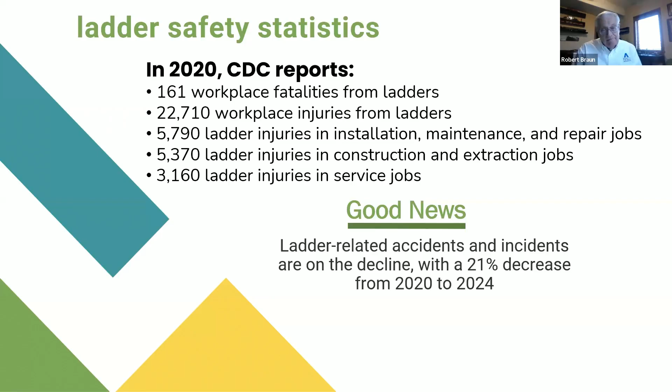Dave always does a great job. I know you are interested in some of the issues that we'll go through, and Dave will cover a lot of this, but these are the primary causes.

Incorrect extension ladder setup angle. In fact, about 40% of cases are due to incorrect extension ladder setup, and I know Dave will cover that. And inappropriate ladder selection, choosing the wrong tool, not the proper size or proper duty rating, and I know he's going to speak to that.

Then insufficient ladder inspection, which is, I think, the first step—make sure you inspect the ladder before you use it. And then improper ladder use, not using the ladder properly. So I know you'll learn some basic facts about ladders today and their safe use during this session. These are the basic tenets that will raise your awareness and help you prevent injuries. Just like any tool, using the right tool and using it the right way is fundamental for achieving safety.

You'll also learn about some of the design features available in ladders that you may not be aware of, which I find very interesting. I think you'll find this presentation both educational and interesting. So let's get started. It's my pleasure now to introduce Dave Francis from Little Giant.

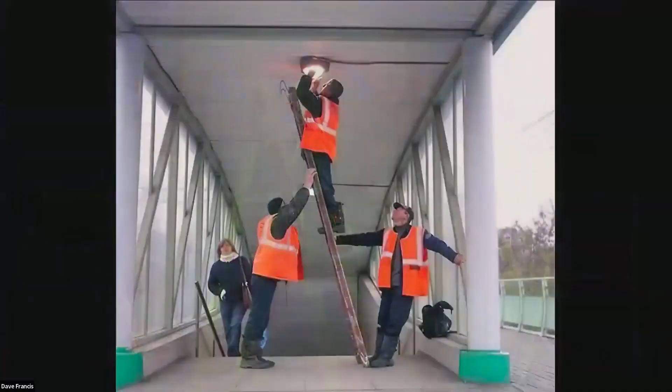We kind of like to talk about, set it up, why we talk about ladder safety as much as we do. I get sent crazy pictures probably weekly, but over the years, and if you've heard me talk before, this has always been my favorite picture because it tells too many stories. These guys are trained, they have the right PPE, they probably have the right ladder on their truck. They just got creative to try to save a little bit of time. But we're talking about multiple OSHA fines, multiple possible injuries, and even some possible lawsuits because of the lady coming up the stairs if she gets pulled into their shenanigans.

So when we talk about ladder safety, creativity is the enemy of safety.

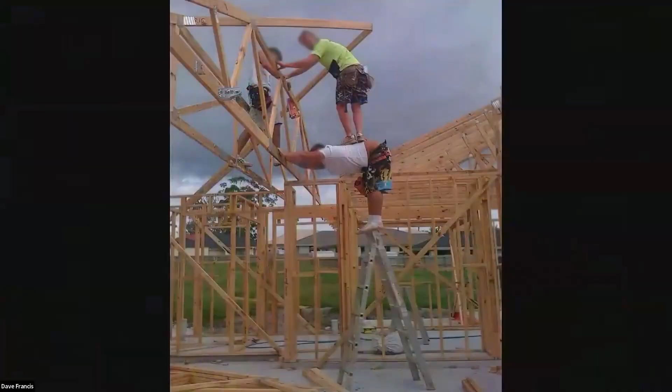Here's another one of my favorites. These are framers, and we know framers will do just about anything to get the job done, get on to the next job. But if you look at the guy on the ladder, he's actually stocking-footed. The guy on top of him has shoes. So I don't know how they thought that was going to work out, but obviously not the way OSHA recommends that we do things.

It is so serious that 4 of the top 10 OSHA violations are work at height related. Fall protection, of course, number 1. You can go past any job site and see guys on the roof without the harnesses and lanyards. Ladders jumped from 5 up to 3, and then scaffolding and training are up on that list, so 4 of the top 10. More critically, though, is the fatal 4.

OSHA tracks fatalities, and falls is by far the number one cause of fatalities. Of course, OSHA doesn't track automotive accidents in this because that's DOT, but fatalities from falls is right up there with fatalities in car crashes. And so we think that we need to spend a little bit more time talking about working at height because it is the number one cause of injury and fatality on your job site.

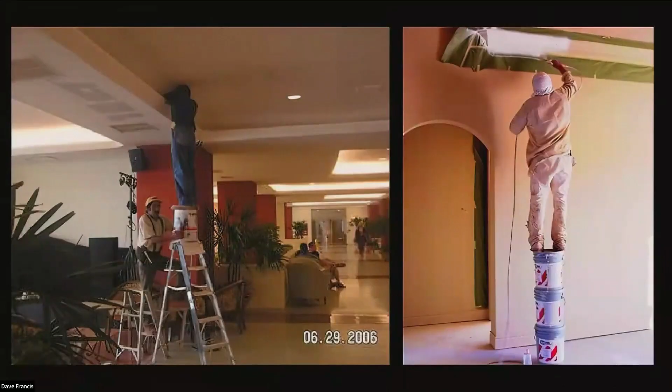When we're choosing the right ladder for the job, choose a ladder. That sounds silly when I say it that way, but when I show you this picture, you completely understand what I mean. Time after time, I see people standing on things that are not ladders to try to work at heights. We've all done it. We've all stood on a desk. We've all stood on a chair. We've all stacked something up so that we could climb up and get something done.

Stop what you're doing. Go out in the garage. Go out in the shed. Get Grandpa's ladder, drag it in. Don't stand on that bar stool that spins around to try and get that job done.

Choose a ladder. Ladders come in fiberglass, aluminum, and wood. There are no more wood manufacturers, so if you have a wood ladder, it's an antique. Generally, ladders in the United States are aluminum, shiny silver material, or fiberglass, which will be a color - a yellow, an orange, or a green.

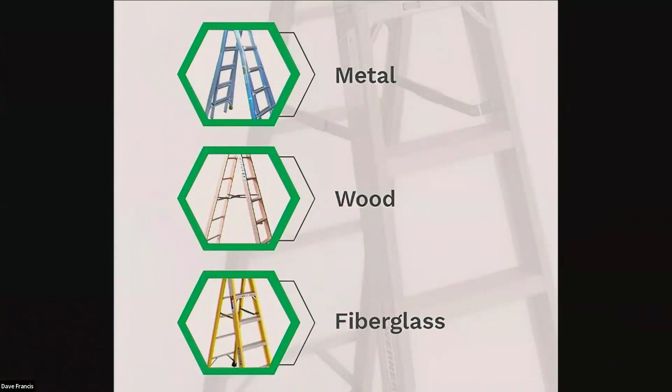Why do we default to fiberglass? Well, fiberglass is non-conductive. So the majority of ladders used for homeowners, the lightweight, inexpensive ladder that a homeowner would buy, are going to be aluminum ladders. The ladders that we see on job sites are fiberglass because they're non-conductive.

Well, people ask me all the time, those rungs sure look aluminum - how is that ladder non-conductive? Well, the side rails are non-conductive. The climber is insulated from the shock, or grounded from the shock. So all fiberglass ladders will have aluminum rungs.

There's just a very few specialty ladders used in turbine engine power that are completely made of fiberglass, but they're very rare and very expensive. You're grounded through the side rails.

Okay, weight rating. Weight ratings start at 200 pounds. Those are homeowner weight ratings - lightweight, flimsy. Don't put them on a job site. It doesn't say construction and industrial until 250. But I want to talk about why we recommend you have 375-pound rated ladders on your job site.

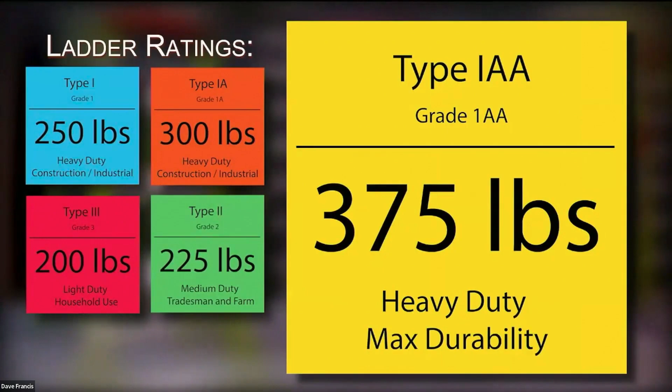You've seen guys on job sites, and I'm getting up there, but the weight that is supposed to be on the ladder is not the weight that you tell people you are. It's the weight that the scale says that you are, not the weight from your driver's license. Then adding your PPE, adding your clothing in a cold place, any tool belt, anything you're carrying up - it's pretty easy for some of the guys on a job site to get over the 300-pound mark.

And if they're over 300, then we need to jump up to a 1AA, 375-pound rated ladder. We'll talk a little bit more about that rating in a second, but make sure that what you're wearing, what you're carrying is under the rating on the ladder, and that label is clearly visible to read.

Now, style of ladder is important. This is a step ladder or an A-frame ladder. Looks like a big capital A. The standard calls this a self-supporting ladder because it stands in the middle of the room.

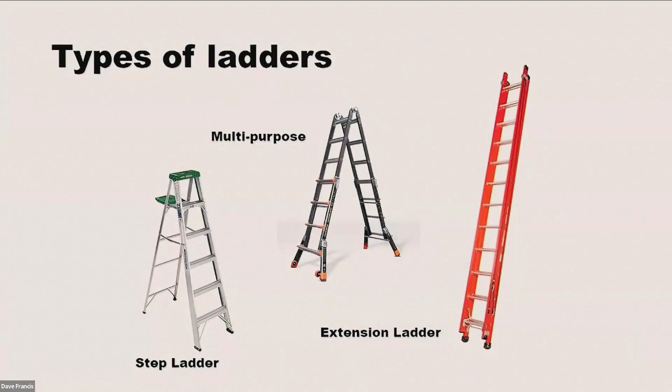You can also have a straight extension ladder. Those are also referred to as non-self-supporting or lean-to, depending on where you're from. And then multi-purpose are ladders that will telescope or bend from shape to shape. Little Giant actually invented the multi-purpose style of ladder 52 years ago, and those are designed specifically to go into stairs.

But ladders are meant to be used for the purpose for which they were designed. So make sure that you're using the ladder for the purpose that it was designed.

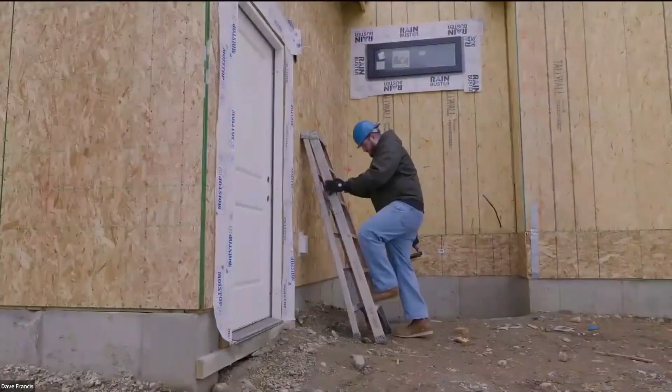For forever and ever, we told people never close an A-frame and lean it against the wall. Well, why? Well, old A-frames, Grandpa's A-frame, the back legs would swing open and contact the ground and throw your balance off. The top cap was just a black plastic cap - it didn't have any grip.

So ladder companies, all ladder companies in the United States right now, make a leaning A-frame because workers just have to get in all of these really tight, hard to get in areas. So we designed our newer A-frames to lean.

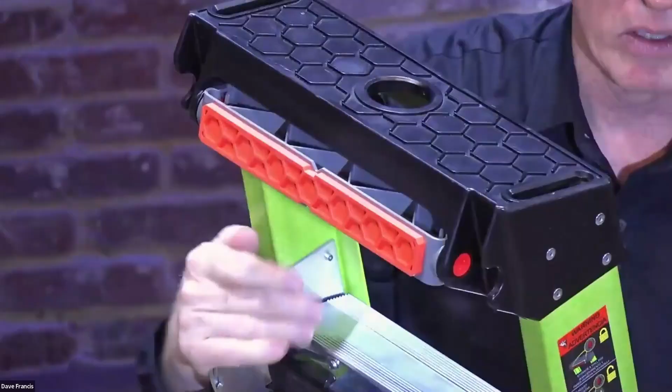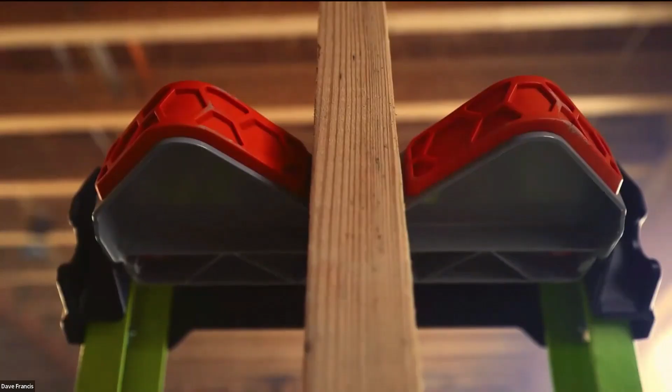The way to do that is have this pad here at the top cap that's going to support the ladder. Now, if you're not going to a flat surface, that's going to flip around, and now that's going to go to corners and studs and poles so that the top of the ladder is really going to grab a hold.

Know that because there are newer ladders that can lean in the A-frame position, that doesn't mean your old Grandpa ladder can now be leaned. Make sure that it's clearly stated on the label that it's a leaning A-frame ladder, but that's really a great way to get into a lot of the hard to reach places.

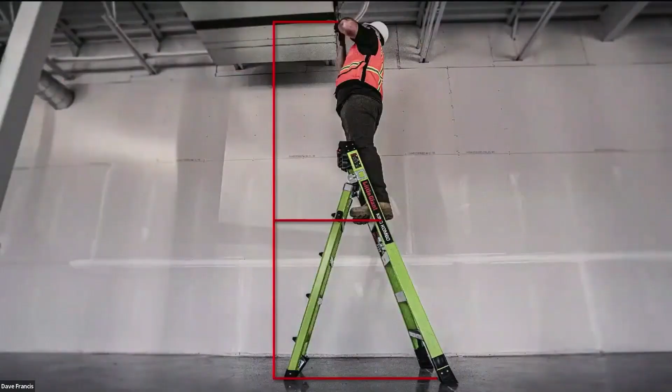Let's talk about the size of the ladder now. This is a 6-foot A-frame. OSHA says don't stand on the top cap, don't stand on the top step. So on a 6-foot A-frame, I'm really standing 4 feet off the ground if I'm using the ladder correctly. Average height and reach of a worker gives you an extra 6 feet. So from a 6-foot ladder, I can safely work around 10 feet.

If I need to work higher than that, I need an 8-foot or a 12-foot step ladder. Just know that you're going to need to stand 2 feet from the top so that you have something to lean into and maintain balance and control. And you're going to add another 6 feet from that standing surface in order to get your working height.

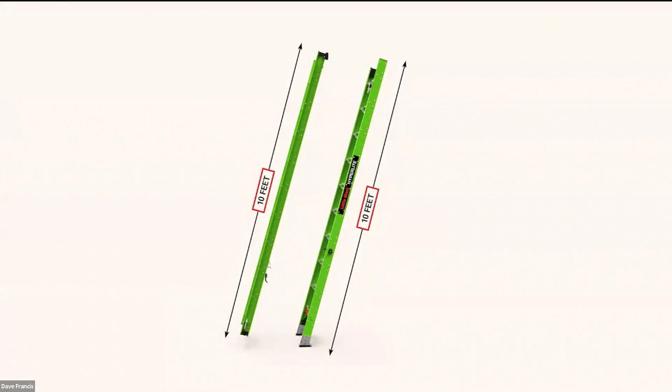What about straight extension ladders? If you go to the store right now and buy a 20-foot extension ladder, that ladder is going to be 20 feet of ladder side rail. So you're going to get two 10-foot sections of side rail that add up to 20 feet. We clearly mark it on the label, 20 feet of ladder. But that's not how you use it, right? To use those two sections together, you're going to have 3 feet of overlap. So a 20-foot ladder that you buy in the store is only going to be 17 feet long in the usable position. And then OSHA says 3 feet above the roof line.

So now I'm going to a 20-foot roof line. I'm 3 feet shorter and I need 3 feet extra. I need 6 extra feet. So I need a 28-foot ladder to go to a 20-foot high roof line.

So why is that? I'm going to jump to that in a minute. Sorry, I'm talking to Paxton in the control room.

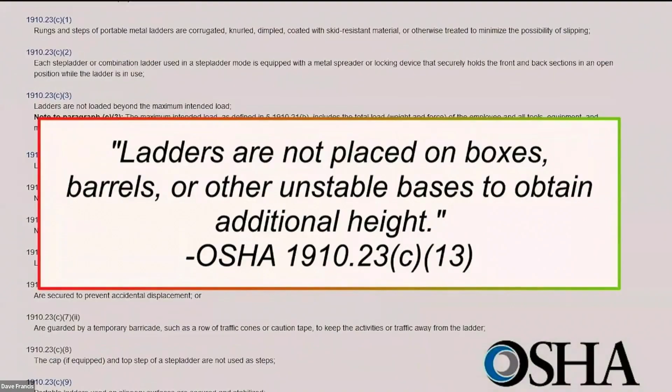In order to gain height with a ladder, don't pick it up with a forklift. Don't stack it on boxes, barrels. Don't climb up on the railing of any ladder. Just not the safe way to use the ladder. Don't straddle or sit on it. And please don't try to put it up on tables to try and gain extra height. The ladder is rated at 300 pounds, but the tables or barrels that you put that ladder on are not rated for that 300 pounds or that position.

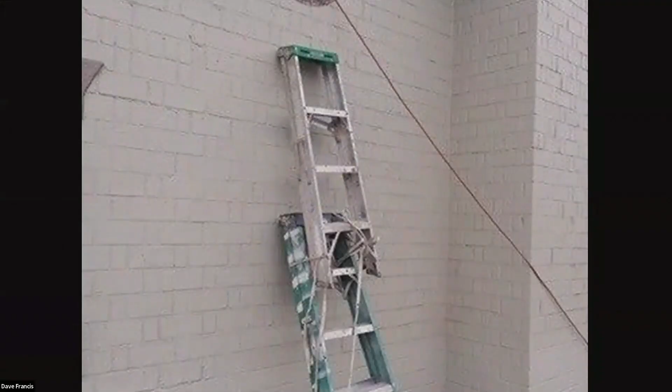Never try to tie two ladders together. You just don't have strong enough duct tape or wire or rope to try to put two ladders together to make the right ladder for the job. If you don't have a big enough ladder, stop what you're doing, go back to the shop, get the right size ladder. If you're at home, go across the street, meet your neighbor, and borrow his. Get that done. Don't try to create something. Again, I've said this before, creativity is the enemy of safety.

So we've chosen the right ladder for the job: the right material, fiberglass, the right weight rating, 300, 375, the right style, and then the right height. Now that we've got the right ladder for the job, we need to inspect it.

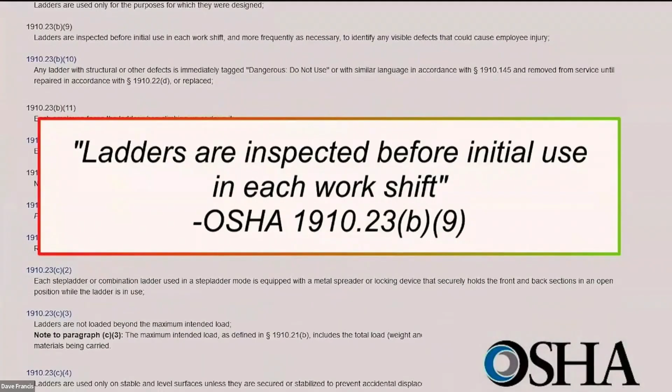Inspection in the standard is a little tricky, and I get asked this in the questions a lot, so I'm going to try and jump ahead of it. Ladders need to be inspected when you first receive the ladder, when you first buy it. Ladders are damaged in transportation most frequently, so we see ladders being damaged just being delivered to the customer. They need to be inspected at the start of every shift or before each use. And they need to be inspected regularly and periodically by somebody who's in authority and has the power to do something about a bad inspection. That's usually interpreted as a manager or somebody from the safety department doing a detailed inspection once a year or semi-annually.

For a visual inspection that you do every time you climb a ladder, we don't need 15 minutes, just a quick visual. The things that get overlooked the most are the feet.

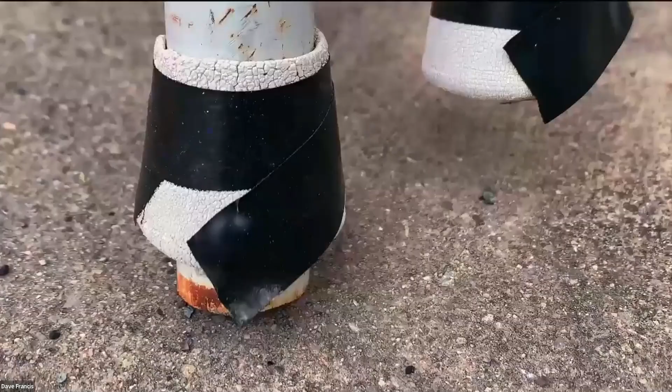The feet of your ladder are made of a softer material with tread at the bottom, designed like tires on your car to grip the ground and prevent the ladder from slipping out from underneath you. If those feet are damaged, missing, or worn out, they can simply be replaced by removing a nut and bolt or a couple of screws, and ladder manufacturers have stacks of new feet so you can swap them out quickly. Don't throw your ladder away because you have bad feet, just get new feet. Remember, that's your connection to the ground, so we want as firm a connection as possible. We don't want that ladder slipping or moving while you're climbing it.

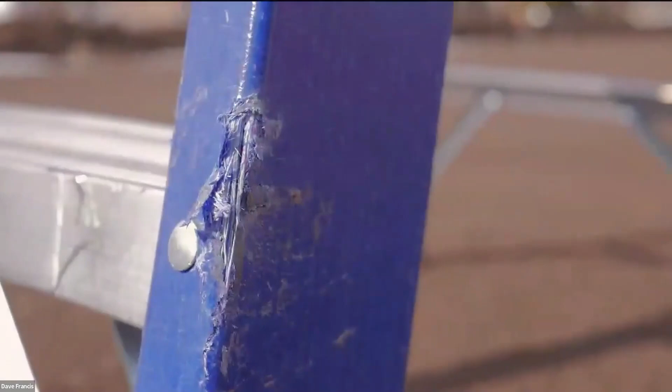Now, the side rails of the ladder, if they're bent, broken, cracked, or split, the ladder needs to be tagged out, removed from service, and reported to a supervisor.

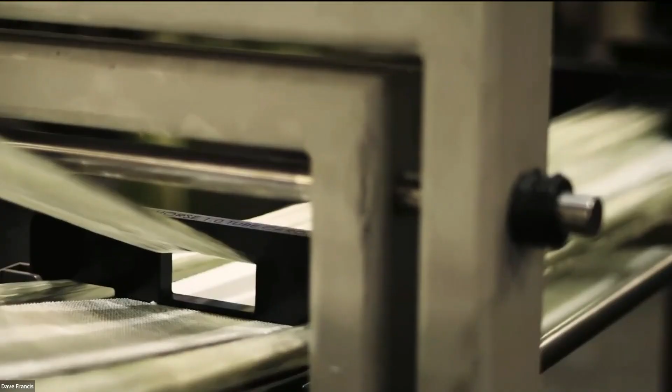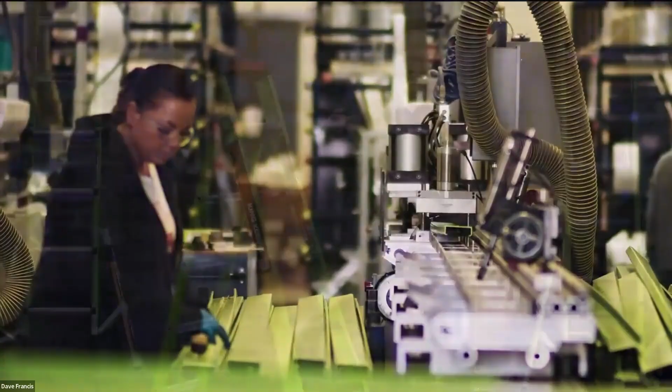Now, fiberglass is interesting. It's got some great properties in that it's non-conductive, but it also has some downsides. When we make fiberglass, we actually use spools of fiberglass string or strand, which is glass spun into threads. That's run through a shaping die and then injected with a plastic resin that holds all of those strands together for strength.

But if the ladder is damaged, hit, or cracked to the point where you can see those fibers through the resin, so if you've dinged that corner and you can see strands sticking out of the glass, that cannot be fixed in the field. It needs to be tagged out and taken out of service. I don't know what that will hold. I know what fiberglass in new condition will hold, but I don't know what damaged fiberglass will hold.

The rating we talked about earlier, that ladder is not going to break at 375 pounds. It's actually tested at 4 times the rating. So a 375-pound rated ladder is tested at 1,500 pounds, that's 5 very large guys on the ladder, and it's not going to break, move, or bend.

The problem is ladders get used dynamically. Ladders get used with minor damage. Ladders get used on uneven surfaces. So we overbuild ladders by 4 times to prevent the ladder from breaking while you're standing on it.

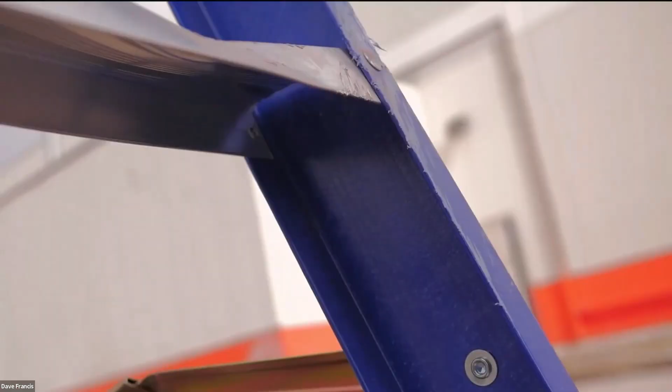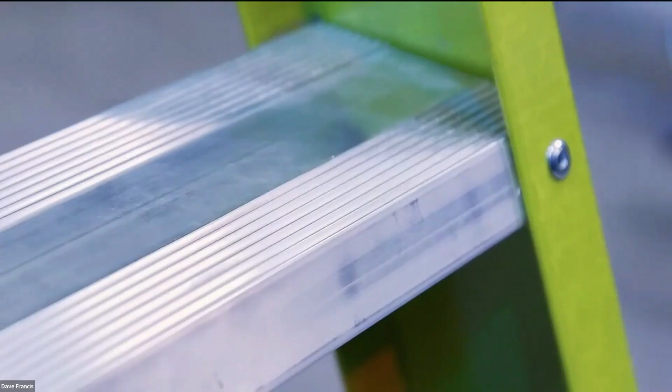You can also see that all these rungs have ridges that run side to side in the extrusion. Those are designed to hold your foot in place as you're climbing the ladder so that your foot doesn't slip off. If those are all filled in with mud and dirt and tar from the job site, clean those steps off, make sure those steps are clean and dry, and that those ridges are grabbing your foot and holding on as you climb the ladder up and down.

Components of your ladder, you're going to have maybe ropes and pulleys, hinges, top caps, spreader bars. All of these things can be replaced in the field. The ladder company will have a kit with directions on how to do that in the field. But repairs to side rail, where I see people bolting 2x4s into the side of the ladder, those are not allowed.

Re-welding your rungs is not allowed.

I inspect people's ladders as I drive down the road. I've been doing this for over 40 years, and so when I see ladders on trucks, I pick up on the things that people do to their ladders, and then they're on their way to a job site to set these ladders up to get work done. And any one of those ladders could be the cause of an accident, because I don't know what a damaged ladder is rated for. I do know what a ladder in new condition is rated for.

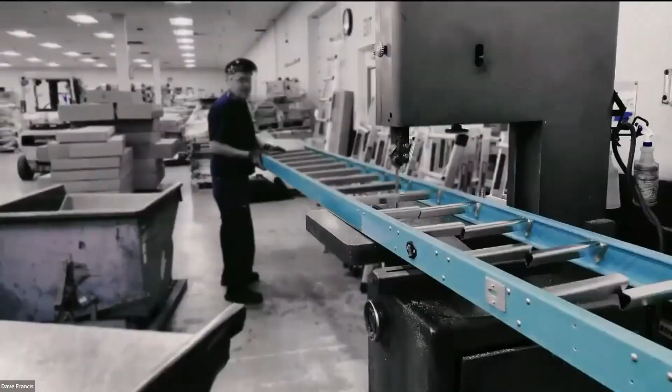So make sure all of your components are in good working order. The side rails and the rungs, if they have dents, cracks, or splits, you need to take that ladder out of service. If you're going to destroy a ladder, please don't throw it, especially if you got your logo stenciled on the side of it. Don't throw that ladder in a dumpster without cutting it up. Unfortunately, there's been lawsuits in the United States where people have pulled ladders out of other companies' dumpsters and then sued that company because they didn't dispose of the ladder correctly.

Don't cut your ladder through the fiberglass. It's very abrasive and will wear out your blades really quickly. Cut it down the middle. It'll cut like butter through that aluminum and plastic and make it unclimbable at the same time. So if you're going to dispose of a ladder, make sure that you get it all the way to the dump, or that you cut it up so that it's unclimbable. You just don't want to give people access to a usable ladder in bad condition, or you're still liable for it, unfortunately.

All right, we picked the right ladder for the job: fiberglass, weight rating, style, size. We've inspected it to make sure that it's in good condition: feet, side rails, rungs, components. Everything's in good working order. So now the ladder's probably not going to be the cause of the accident. Now the cause of the accident is going to be us - decisions that we make, things that we do.

Again, please do not get creative in ladder safety or in ladder setups. No matter how many old phone books you use or wood things that you build up to try to get into those hard to reach places, know that that's the first time that setup is being used. It's never been tested before, so you're taking this huge risk of being the crash test dummy on the maiden voyage. Please don't take those risks. I know we all think that we're structural engineers in our head.

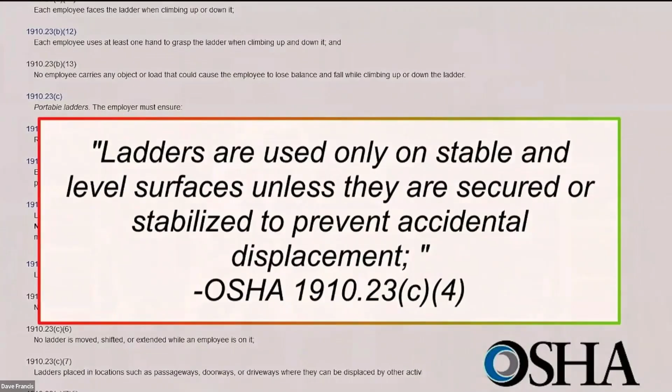But OSHA says that ladders need to be set up on stable and level surfaces. And if that's not possible, then the ladder needs to be secured or stabilized to prevent accidental displacement. What does that mean? Well, if you can set a ladder up in a condition with a perfectly flat floor, so that it's stable and level, then I'm fine to climb just by following the rules of 3 points of contact, making sure that I just keep the rules of climbing.

But when we're out on a job site, how often is the ground actually level? If the bottom of your ladder is a little off, I have people tell me all the time, I climb it over here. So you're doing a Cirque du Soleil or geometry calculation that if my ladder's that far off, I can climb it over here, and I'm just going to balance it out and stay in this thin line of my balance point. That's not the way OSHA wants to do it. What do we see on job sites that people do the most often?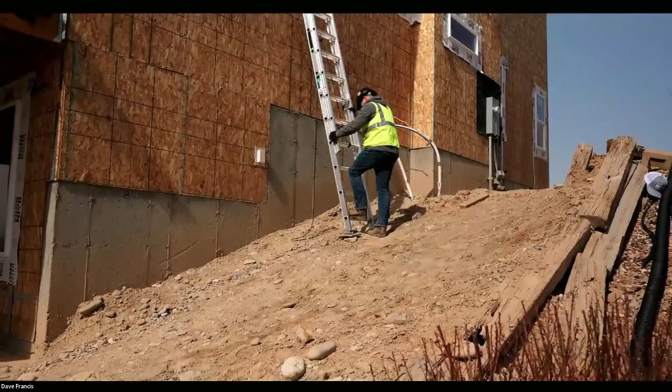The most common thing I see is that people will go around the job site on an Easter egg hunt for the right size piece of garbage, scrap wood, a rock, to build a Jenga pile of death to put their 28-foot extension ladder on. So they're placing their safety equipment on a makeshift stack of garbage from the job site. Not the way.

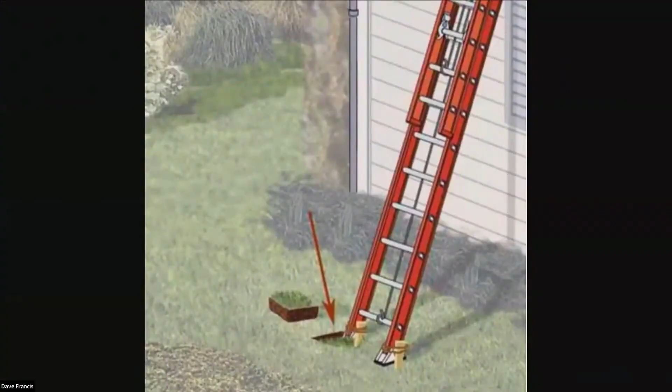No one's going to argue with me that that's the preferred way to do this job. OSHA says dig out the high side. Never build the low side up with bricks and boards. Always dig out the high side to level your ladder. This just doesn't happen very often because it's labor intensive and you don't go around with a shovel and a level. But there are some easy solutions to how to do this.

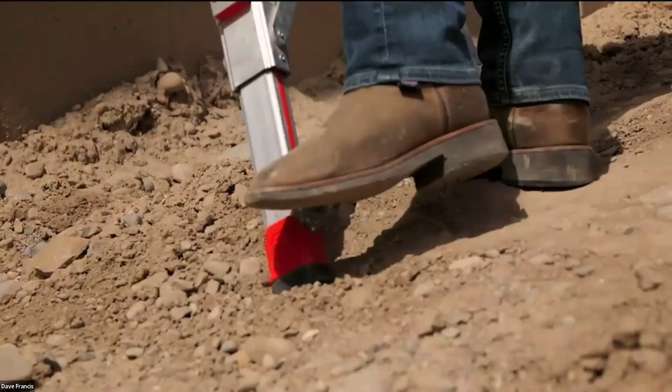There are ladders designed with leveling capabilities built right in. So in a situation of uneven ground, you'd be able to just open the leveler and level to the work surface, getting the job done quickly and safely with a very secure base at the bottom.

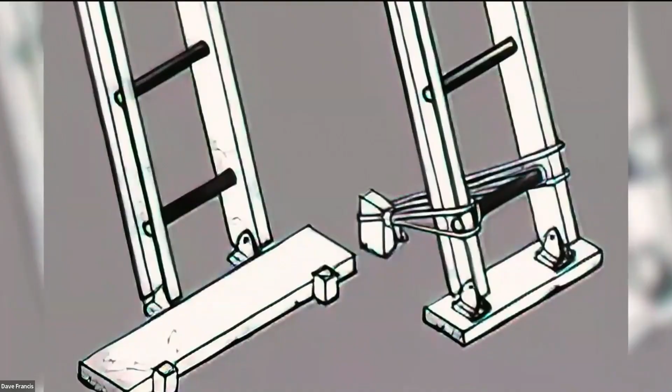If you need to stabilize grandpa's traditional straight extension ladder, there's a lot of diagrams in the OSHA handbooks about how to build blocking or a stake, then strapping at the top of the ladder. We want to make sure that if you're strapping at the top of the ladder for your company, don't use bungee cords to rain gutters. Make sure you're using an engineered strap that's designed to do that work.

This is especially important if the ladder is being used by multiple individuals. If you have multiple people using the same ladder to gain access to the roof, that ladder needs to be secured in place so it doesn't get dislodged in between people. That's a key factor we always overlook. If I'm going up on the roof, I can go up and do an inspection and come back down. But if I've got 10 people going up and down, I need to make sure that ladder isn't moving. It's got to be secured in place.

So we've talked about the side-to-side angle. Let's talk about the extension ladder angle. There are a lot of times when you're going up on the roof that you need to decide what angle your ladder is leaning against the wall or onto the roof. We don't go too steep, or the ladder will fall over this way. And most people go too shallow, which means my forces are going out this way, and then the bottom of that ladder is going to kick out from underneath us.

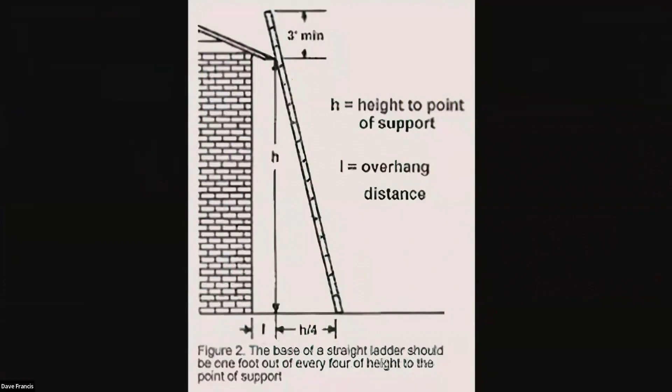So OSHA's given us a little diagram, bless their hearts. For every 4 feet we go up, we come out away from the wall 1 foot. But we only measure up to where the ladder makes contact, and we come straight down from that point. So we don't measure out from the wall, we measure out from that make-believe line that comes down from the eave. I can't do geometry.

I can barely do my grandkids' second grade math. So firefighters figured out a long time ago they don't have time to do the math equation. Everybody's body is built at a 4-to-1 ratio, your height to your arms. So put your toes at the bottom of your ladder, put the palm of your hand at the side rail or rung at shoulder height, and you'll set your ladder up at 75 degrees every time. Before you climb an extension ladder, make sure you hold your arms straight out. It only takes a second, that quick. You can see the A-frame ladder is already set at 75 degrees. That's exactly where my hands go to set that ladder up in the proper position.

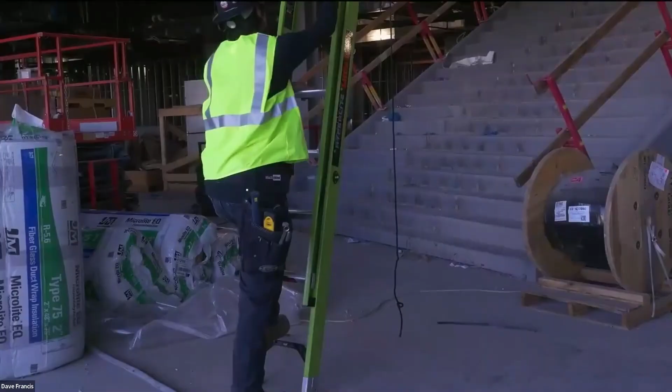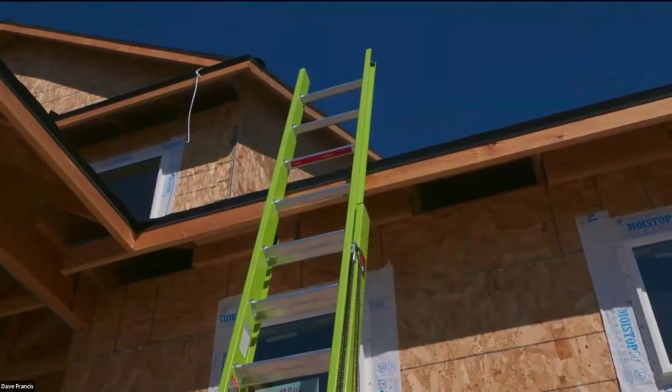Little Giant actually adds some advantages on extension ladders, where we put a bubble level on the side that tells you you're exactly at 75.5 degrees. But use the firefighter method, that'll get you at that 75 degrees almost every single time. When you're setting up a straight extension ladder, make sure you're 3 feet above the roof line. We talked about that before. That's the number one cause of citation from OSHA.

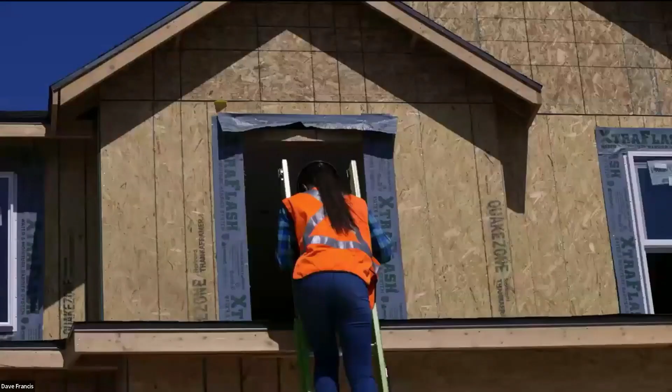50% of the citations involving ladders are just because of this one issue, so it's a red flag violation. We really need that 3 feet of ladder to hold on to as you transition on and off of a ladder.

Now, if you're going up onto a roof to work, you're gonna need to transition into a fall protection system. I don't want anybody to criticize that. She was going up for an inspection, which technically she can do without having that tie off, so if anybody's gonna call me on that, we thought ahead.

Now we want to talk about proper climbing techniques. We started climbing ladders when we were little kids, so we do things wrong that we've done our whole lives. There's 3 paragraphs in the OSHA standard that kind of go together, and they really point out what OSHA is trying to accomplish with these 3 sentences.

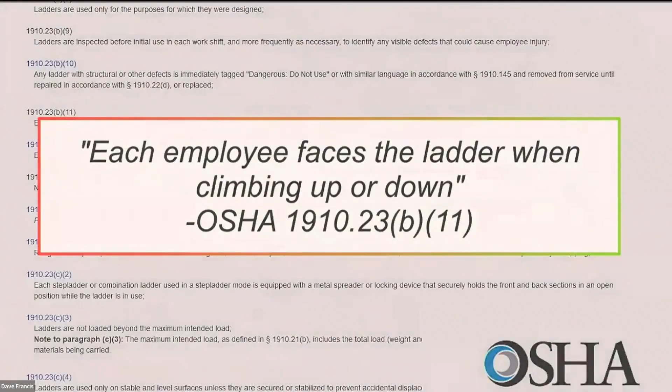I think the first one is maintain contact with at least one hand as you're going up and down, and I'm going to emphasize the going up and down. So that's really the 3-point of contact rule: 2 feet 1 hand, 2 hands 1 foot, as you go up and down. Face the ladder as you go up and down, and never carry any bulky, heavier items that are going to cause you to lose your balance or fall as you climb.

So OSHA wants you to get up and down the ladder safely, but they're talking specifically about as you're climbing up and down.

Tools should be brought up in buckets or lifts, or if you can carry it up on a tool belt, that's fine. If you have a small tool in your hand, that's fine. But excessive tools needs to come up another way, bigger pieces of equipment. We don't want somebody trying to use a ladder to be a physical lift to try and get a big, heavy, awkward piece of equipment above them. That's just not the proper way to get that kind of work done.

So face the ladder, one hand in contact at all times, and then don't carry big items up and down the ladder. But they really want you to get up and down the ladder safely.

Now, what happens if I stop to do something on a ladder? Most people consider extension ladders a transitional piece of equipment where you're getting from the ground to the roof to do the work. But on an A-frame ladder, my only purpose for going up is going to be to work on something, and that something needs both hands.

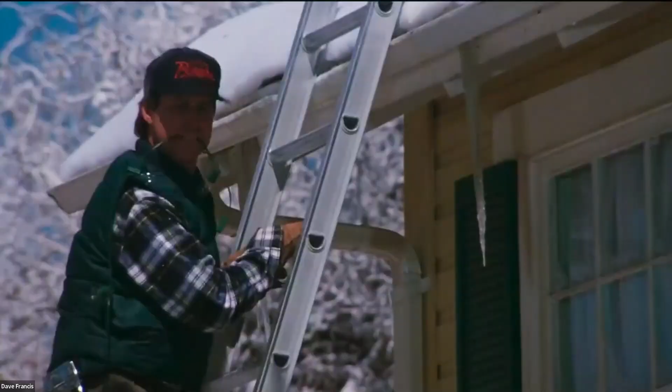I know we get doing a project and we want to get it done fast because we're trying to get into the game or do whatever, and we overreach. We try to get the job done by taking risks. Just follow the basic rules. Again, creativity is the enemy of safety. Please don't try to go beyond the basic rules of ladder safety. Ladders are safe in that they're overbuilt for your weight and for what you're doing, but they're unsafe in that they're easily misused. Does that make sense? It's easy to do, it's easy not to do.

All right, let's talk a little bit about common accidents in the workplace. What are the number one, two, three causes for people to file a claim or take a day off work because they got hurt on a ladder? Well, you'd think all of them would be from falling off, but the number one cause, the biggest number of claims filed, are because ladders are heavy and they're awkward. And every time you take them to a job site, guess where they are?

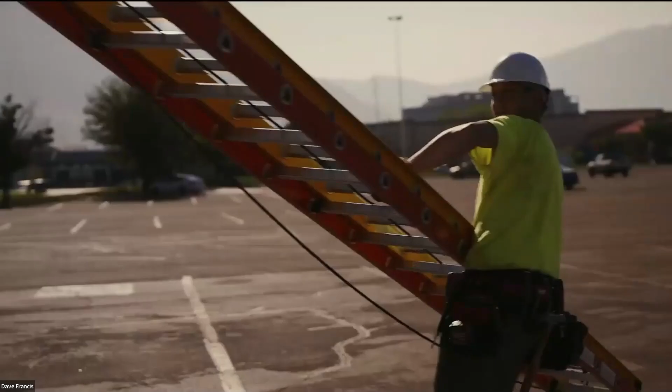They're on the top rack above a van or above a truck, and your employees are now trying to pull the ladder off of the rack by climbing on the wheel well, the door jamb, the tailgate. Some of the most dangerous situations they're in is trying to get their piece of safety equipment off the truck. Know that there are ladder racks that pivot to get that ladder into a more ergonomic position, or if you're sending a bigger ladder that exceeds that 50-pound limit, make sure you've got a couple of people handy on that job site that can help get that heavier piece of equipment off.

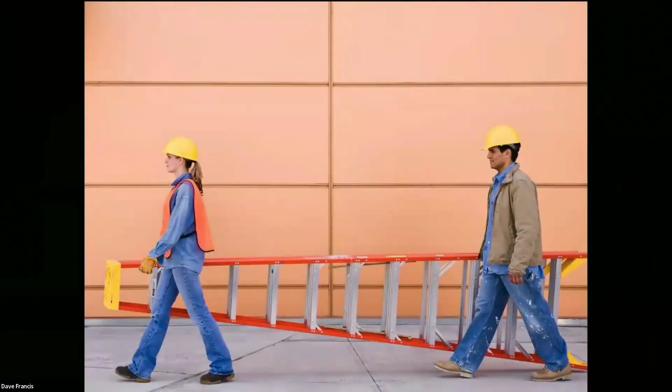We train people to carry ladders a certain way. You can carry it by the side in kind of the suitcase method—that's easy to drop if you need to. If you've got multiple people on a bigger ladder, that's highly recommended, that's best practice. You can put your arm into the rung. Our recommendation is putting it up on your shoulder and balancing it with the front of the ladder slightly elevated. That way, if you trip or fall, you can let go of that ladder and it won't pull you into the accident.

If you're carrying or setting up a ladder and it starts to tip, you don't have the physical strength at the bottom of a ladder, with as much torque there is above you, to stop that from falling. If you stick your hands in to try to stop that fall, it's just going to pull you into the accident. So we see a lot of people injured trying to stop the ladder from falling once it goes. Let it fall—hopefully it doesn't hit any equipment—then re-inspect to make sure you didn't get any permanent damage, and get somebody to help you pick it up and set it up correctly.

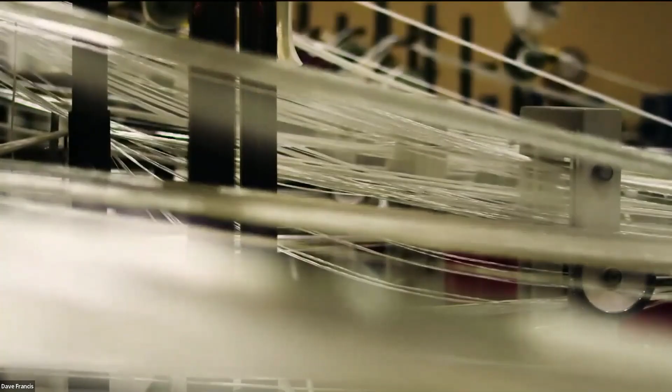So the number one cause of recordable injury with ladders is that ladders weigh too much. So we say get two people to carry the ladder instead of one. But Little Giant made fiberglass material 20% lighter than anybody else on the market. The way we make it here in Springville, Utah—we have our secret way of doing it—we've reduced the wall thickness. We still keep the same extra heavy duty rating, but we're able to lighten the side rail by using engineered matting and the plastics that hold everything together. So our fiberglass ladder is lighter than everybody else's on the market.

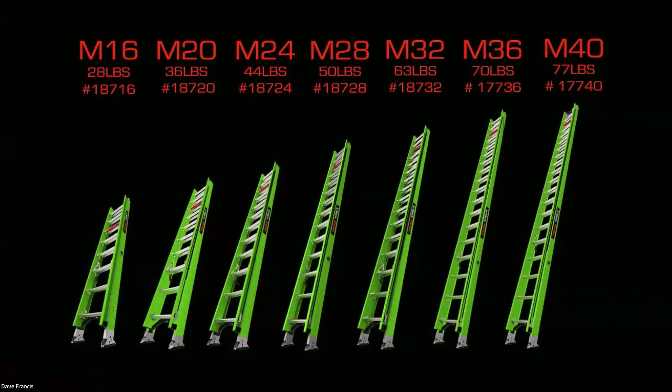Other companies have started making lightweight ladders because they saw people responding to Little Giant. We make extension ladders from 16 feet all the way up to 40 feet, and you can see the weights there. A 28-foot ladder weighs 50 pounds with Little Giant. That normally would weigh around 72 pounds or more from a standard extension ladder—just the traditional extension ladders on the market.

Number two, and this one caught me off guard. The second leading cause of accidents on a ladder doesn't happen from one of these steps.

You guys that have been in the safety field - my wife hates it when I use the word guys, and I think I've done that a bunch today. I apologize if I did.

Everybody here that's in safety knows the answer to this question, and that is the most dangerous step or rung on a ladder is this one, the bottom one. About 20% of accidents on A-frame ladders happen because people simply step off the ladder and miss that bottom step, coming down on their ankles or knees.

So we have people with knee injuries, back injuries, because they simply miss the bottom step. Maybe they've been using an 8-foot ladder all day long, and then they run over and use a 6-foot ladder. Well, their cadence is completely off. Maybe it's just Friday afternoon and they're trying to get off the ladder fast, and they think they're at the bottom. So what's the answer to that?

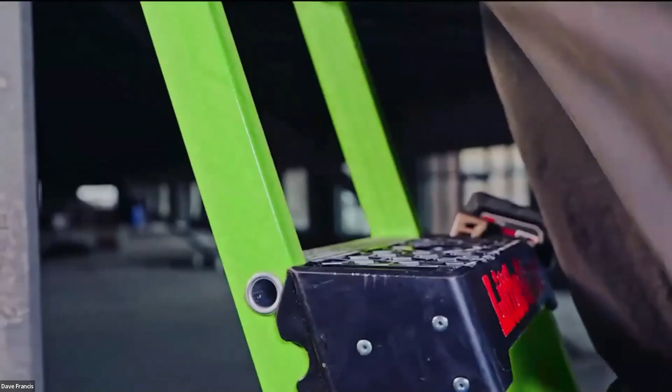Again, what Little Giant's done with a lot of the products you see on set is make them multi-function. So my 6-foot A-frame turns into a 10-foot extension ladder. Now, if I need a couple of extra feet, I just flip up the back side. That cap now becomes a standing platform in the extension position, and there's a tool tray at the top of those back legs that gives me a V-bar to go to the corners and a tool tray to put all my tools in.

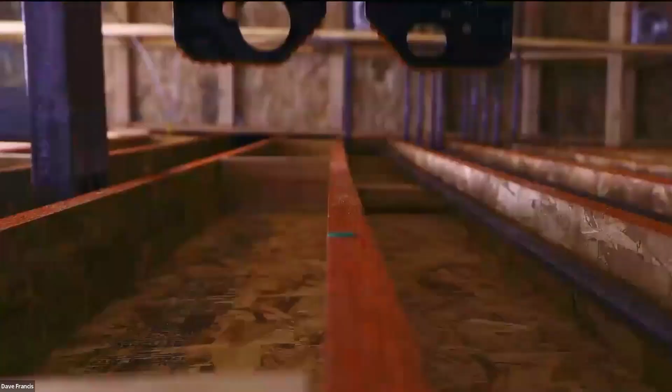So ergonomically, it's the same size ladder as the 6-foot ladder you've always been using. We can just now use it differently to get the job done faster and safer, because you always have the right size ladder for the job. You don't have to switch back and forth.

Now the last two are brothers - we've talked about these a little before - but everybody's seen extension ladders. This is really the most common ladder on a job site, a straight extension ladder.

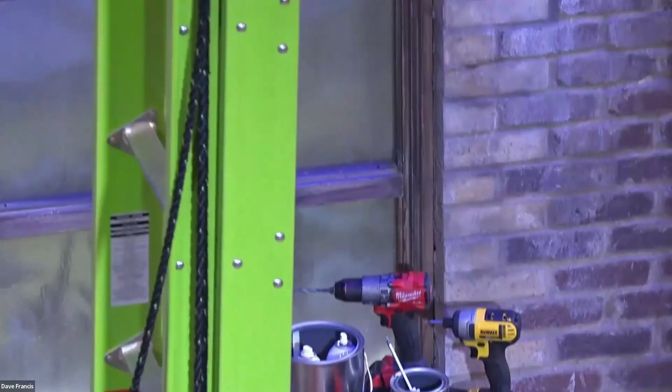Little Giant made it lighter. Little Giant added the ground cue at the bottom. We've done a couple of other things as well. You'll notice on this ladder that the rope is not in the middle - that's where Grandpa's rope was all the time, where you climb it. We moved it to the side rail and double-pulleyed it so that it actually gives you a mechanical advantage as you go up and down.

And then, most importantly, and award-winning, are the outriggers at the base of this extension ladder. For demonstration purposes, extension ladders are straight up and down. Grandpa's extension ladder has the same width at the top as at the bottom. If you overreach at all...

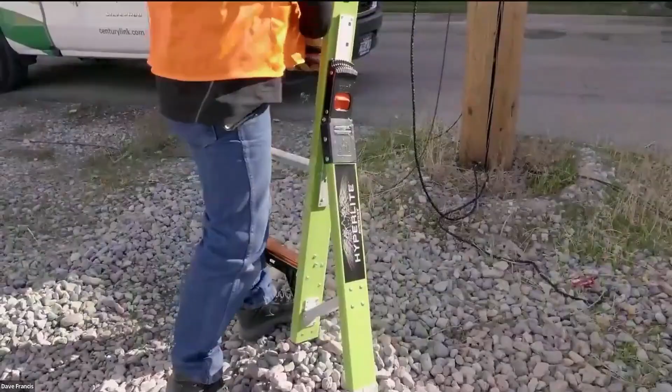...it's not very hard to get that ladder to come over completely. By just opening those outriggers, more than doubling the width at the base, even right here in the middle of the room, I can get way out here and not tip this ladder over because I've got those outriggers adding that stability and security.

So out on uneven ground, gravel or rocks, you deploy those outriggers, and if the ground isn't level, I can just make one side longer. Now on my job site, I'm leveling to the work surface immediately, and I've got that added side-to-side stability that's going to prevent the overreaching tip and fall with the leveling of those outriggers.

What do I do on a bigger step ladder? That's great for an extension ladder, but what about everybody that's moving to what they call a platform ladder instead of an A-frame? Well, the complaint of those is that they're too big and heavy, they're too bulky. Check this one out, 4 inches wide, and as this thing deploys, you'll see the engineering behind it.

That handrail at the top is all tied together, and we've got these one-way gates, a tool tray with compartments that lock and open in place. So that fortress is going to give you that 360 wraparound with that tool tray and the big platform to stand on.

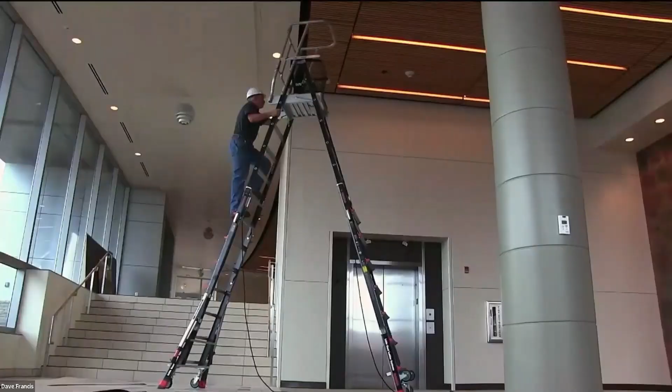Now I'm contained with a 42-inch guardrail system on a non-conductive fiberglass base. I'm just walking through those gates. That's allowing me to just work as though I'm standing in a piece of scaffolding. Each one of those legs is going to telescope independently.

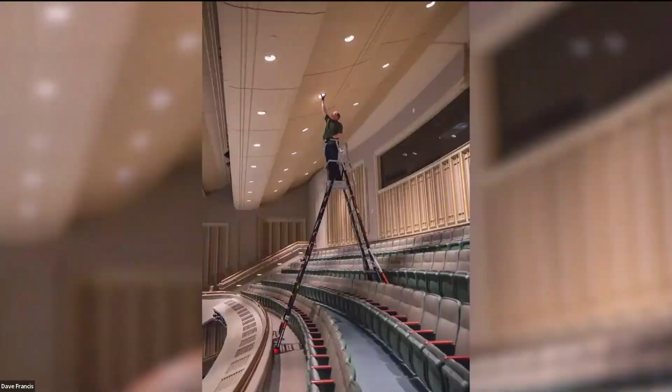So if I'm on stairs, I can go from 5 to 9, 1 foot at a time, or 8 all the way up to a 14-foot high platform. Or on a staircase, I can just adjust so that one side's longer than the other.

What does this replace? Well, small set scaffolding, specialty scaffolding, scissor lifts, cherry pickers. If you need a manual lift on your job site that can easily be moved in and moved out so that the worker can work completely guardrailed, then an adjustable cage is exactly what you're looking for.

I wanted to show you one last thing before we start answering questions, and that was, how far out of the box can we really go as a ladder company? Well, this one is on wheels. I don't have to pick it up. I can just move this ladder wherever I need to. Those wheels are spring-loaded, so when I step on it, the ladder drops. Or I can lock them out by just stepping on the tab and locking those out.

Well, why would I need a ladder like this? What is the purpose of a rolling A-frame? Well, we designed this with a data center in mind. People that were doing a data center, they were having to put together these manifolds that they were doing on the ground, and then they were climbing up their ladder.

So we really can customize the ladder to an industry or to a particular job to try and eliminate movements. It's funny for me to say, but if you can get the job done from the ground - I know we sell ladders, but if you can get the job done from the ground, then that's going to be the best way to do it. If you have to work off of the ground, then Little Giant is trying to tweak Grandpa's ladder to make it safer by design.

Ladders Last was a policy put in place because companies were tired of the ladder industry not listening. We just kept giving companies the same ladder over and over and expecting them to have better safety numbers. The purpose of the Ladders Last policy was to get us to change the design, to add outriggers to extension ladders, to add cages to the top of platform ladders, to provide pieces of equipment that could adjust and safely get into all of the hard to reach places that they needed to get their work done. So what they were really saying was Grandpa's ladders last. We need the ladder industry to change and adapt.

Okay, we got a lot of questions. Yeah, Bob, do you want to ask the questions or do you want Paxton to queue them up here in the studio? Whichever works for you best.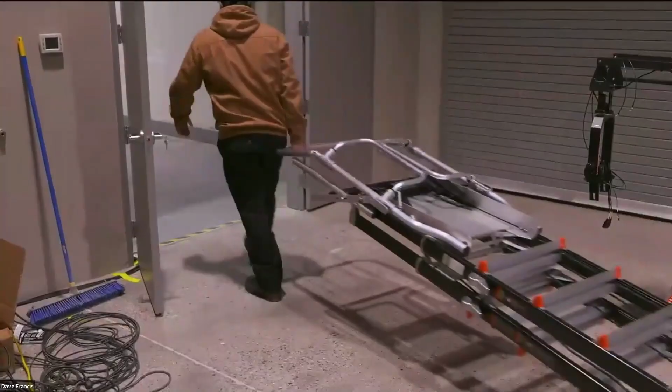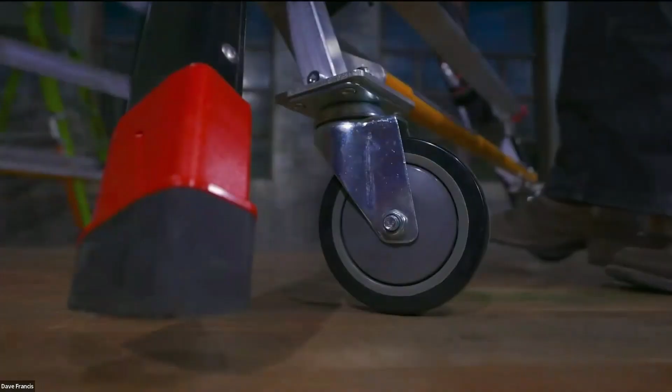That's getting in and out. Once it's on the floor, it's 30 pounds of force to roll it on the wheels, and it's really no force once it's in the standing position because you're using the pop-up wheels, and then it raises and lowers with a rope and pulley system similar to an extension ladder. So you can just guide that up with a rope brake that's going to allow you to raise and lower it from different heights. So it is heavy unloading it onto the floor, but once it's on the floor, it's an easy one-man operation to get it set up and raised and lowered in height or moved around on the wheels.

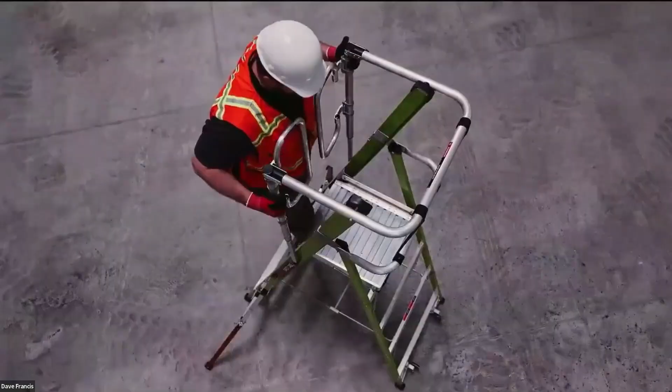Here's one. I think the answer is fairly straightforward, but the ladder gate kits for podium ladders, what about the gates on there, the height of the railings? Since the height of people differ, I think yours are all at the 42-inch height that's required, but I'll let you explain. Yeah, that's correct. People are at different heights, but OSHA and ANSI have just come up with that standard. It's the same with scaffolding or gates or fences around the tops of roofs. They want that to be a 42-inch height, which I know if you're really tall doesn't seem high enough, but that's kind of the fit-all rule of 42 inches.

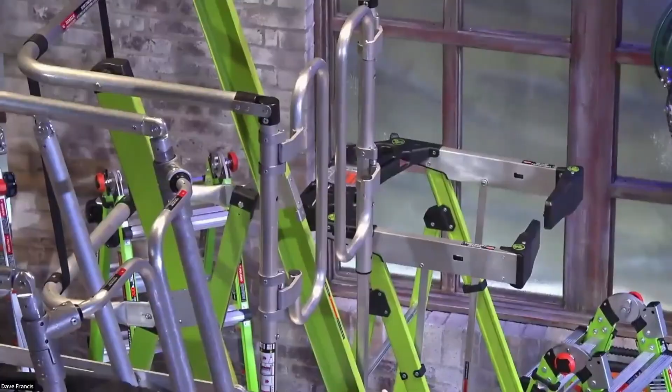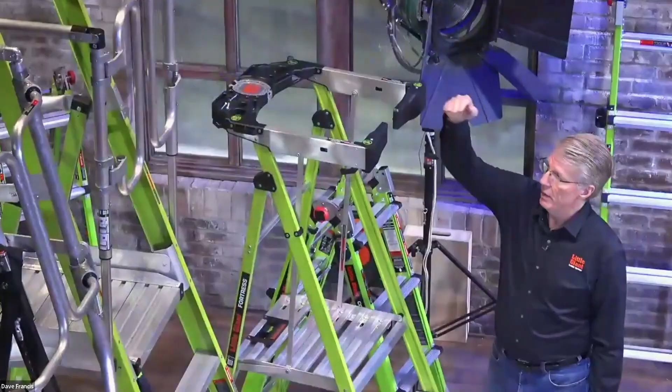And on these cages with the gates, you'll notice that we made the gates up here so that the top of the gate is the 42. The bottom of the gate is in line with the midspan. So we're trying to keep that containment all the way around, both at the top level and at that midspan level. When you jump down to a platform ladder like a podium or a fortress, then you're only going with that guardrail around the top, and that's based on platform ladder standards, where the cage for Little Giant is kind of a combination between scaffolding and ladders that we've kind of made up. So we test to both standards to make sure that we're covering the guardrail standards for scaffolding and the base passes all of the ladder standards. Sorry, that went on too long.

No, that's okay. That's good.

So what are your thoughts about keeping the waist below the top of the ladder safety rule? Keeping your waist, don't go higher than your waist equivalent to the top of the ladder?

So that's a great question because it brings up another question that we get asked a lot, and that is OSHA has a very limited set of rules for ladder usage. It's not really detailed. Most big companies, most companies that take safety seriously, have their own safety procedure that supersedes the OSHA standard. But when OSHA comes in to look at your safety, they aren't judging you to the baseline, they're judging you to your standard. So if your company standard is, we really feel like you're safer if you never go above waist high, instead of, well, the alternative is I'm not supposed to use these two rungs. So you're saying my 6-foot ladder, I should only stand 2 feet off the ground, where OSHA says I can stand 4 feet off the ground, and now I have to keep my balance with my knees.

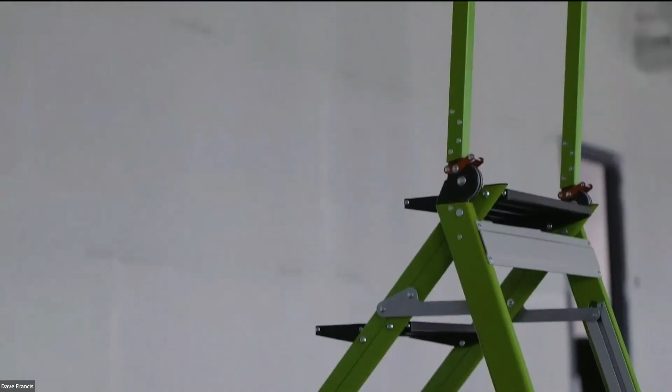Now, step stools are a lot of times looked at as a homeowner product because the box stores have kind of cheapened them up, and you can get the $19 special at Black Friday or something like that. Little Giant we have made for the last 50 years, this is one of our best-selling products, a product called the Jumbo. And the Jumbo comes in aluminum and fiberglass, and it is basically a portable staircase. So it has the same run of a staircase and the same ability to just walk up and down it.

My favorite part of it is, as a portable staircase, I can put this against the tailgate of my truck, and now instead of doing the old man jump that hurts my knees, I can just use it as this portable staircase in and out.

But if you're doing any interior work, any work where you just need to be 3 or 4 feet off the ground, I recommend using a step stool instead of a step ladder. That's going to give you waist-high support and foot support at the same time, unlike a traditional A-frame ladder. That's one of the arguments to go to a platform - you're fully supported here, but waist high on your support at the top.

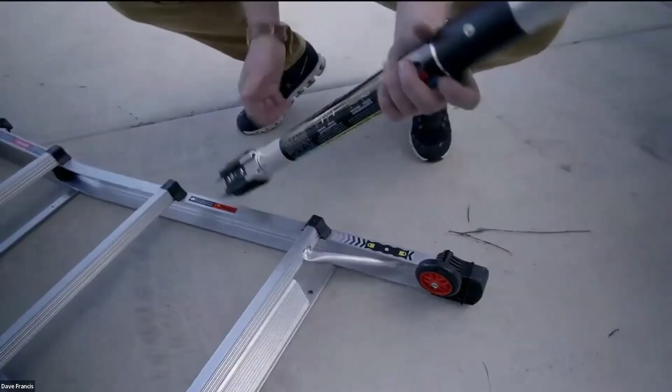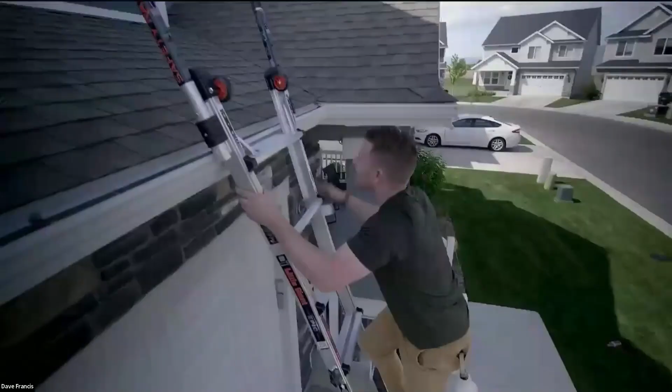That is one of the most useful accessories in the industry - a walkthrough at the top of your ladder. It's so comfortable to transition on and off if you've got those handrails that allow you to just walk directly onto the job.

If a step is broken, do you have repair services for that? There's a third-party company called Batavia that goes out and services big fleets of ladders, like for AT&T, Comcast, or Spectrum. But for the average user, we don't recommend changing steps or rungs in the field, mostly because the tools to set the rivets aren't readily accessible, and if the rivets get set too hard, they will crush the fiberglass, and the rungs or side rails get damaged. I think that's 100% cause for removing the ladder from service and getting a new one.

Components that are damaged, we can get those replaced for you just by calling the 800 number. But side rails and rungs, we want to stay away from that because it's just too much factory machinery that had to put that together a certain way - we can't replicate that with a pair of pliers and a hammer out in the field.

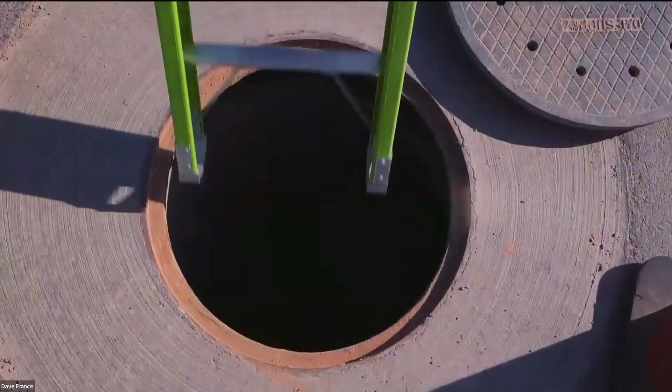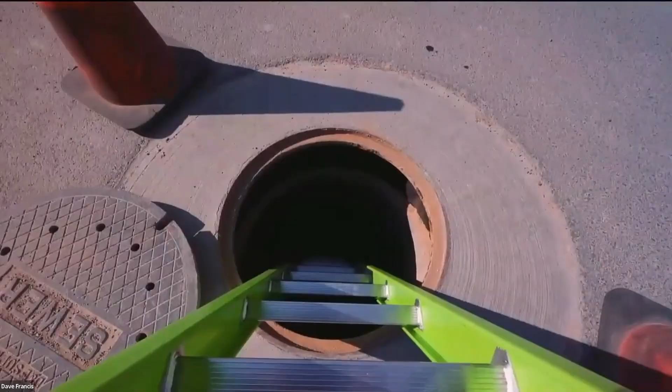Do you have a recommendation for a specific ladder for getting into and out of manholes? We do. Manholes are really tricky. You know why manholes are round, by the way? You can't drop a manhole through the hole - if you have a square cover, it can drop down to the bottom, but that circular manhole can't drop through that hole. That's the trivia for the day.

Yeah, we do make a thinner manhole style ladder, but it's in components. The depth of those vaults vary, so you can use those in a 4 or an 8, or in combinations together to get up to, I think, a 16-foot or 20-foot ladder. You don't have to have 10 feet of ladder sticking out the top all the time if you're going into a short vault, because you can take those apart.

Are there places that you can have people cut up the ladder for you? No, I don't think so. We have the advantage of just having a chop saw in the building, but otherwise, bang it up, dent it up, or take it straight to the dump.

Just don't leave it on top of a dumpster where somebody can see it and grab it. We were on a photo shoot with the National Association of Home Builders, and we threw a guy's ladder away in the dumpster because it was just sloppy all over. I threw it in the dumpster and said let's get a different ladder. Half an hour later, a different crew drove by with that ladder in their trailer. So people hang on to old beat up ladders like crazy. I don't know what the appeal is, but never climb a damaged ladder.

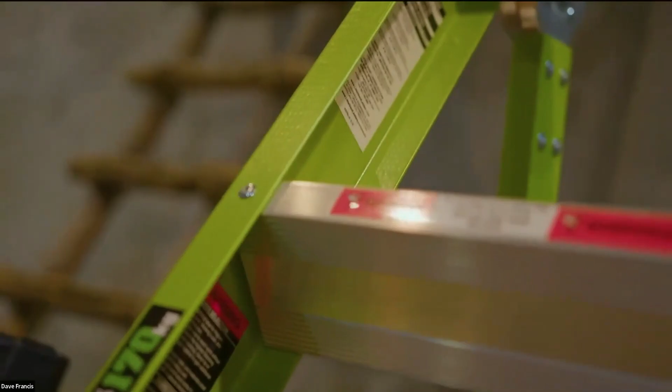A thing that the ladder industry has done, where we really kind of copied the European market, is we've moved all of the informational stickers to the inside of the rail. So the only thing on the outside now is going to be branding, where the inside of the rail is going to have all of your safety labels. Hopefully that's going to protect those a little bit better from getting scraped off as they go in and out of the truck. Ladder companies will send you replacement labels if you just call and let them know what model ladder it is. That's something we didn't used to do, but they will do it now.

Make sure that your labels are legible, so that you don't get thrown off a job site. Some GCs will get picky about that and tell you to take your ladders off until you get the labels replaced. I have heard people say that the first thing they do when they get a new ladder is go over the label with clear packing tape, and then the clear packing tape gets messed up instead of the label. But just little tricks that people have told me over the years.

Do you need fall protection once you are 4 or 6 or 10 or 15 feet off the ground while on a ladder? The way the standard is written, in the walking working surface rule, if you're 4 feet off the ground you have to have fall protection, or 6 feet in the 1926 standard, unless you're on a ladder.

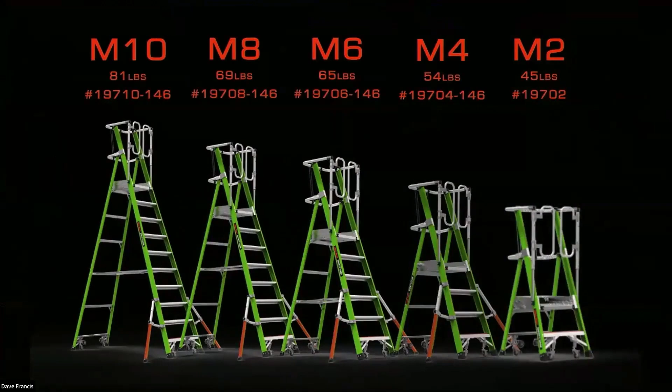Bob, you answer that one for me. If you go above the protection rails, then you're going to be in violation. We actually make a 2-foot version of this, which you'd think would be ridiculous - it's one step and then the platform. This is because Disney World has patios with lights around the edge, but to get to those lighting fixtures you'd have to go above the handrail. So their ladder has to take the handrail above that handrail to keep them safe, always having the proper handrail when you work.

I know you addressed this, Dave, but it talks about, when you're ascending or descending a ladder, you have to keep both hands on the ladder. So is it best to have your hands on the side rails or the rungs or steps of the ladder? That is an age-old argument.

I've been on thousands of job sites over the last 40 years, and the majority of people who climb ladders for a living climb with their hands going up the side rails. That just seems to be the way. If I ever see somebody holding onto the rungs, it only really works on an extension ladder to go rung by rung. On a step ladder, you're grabbing these big wide steps, so it's more comfortable to go side rail. But almost always I see on jobs - there isn't an OSHA rule.

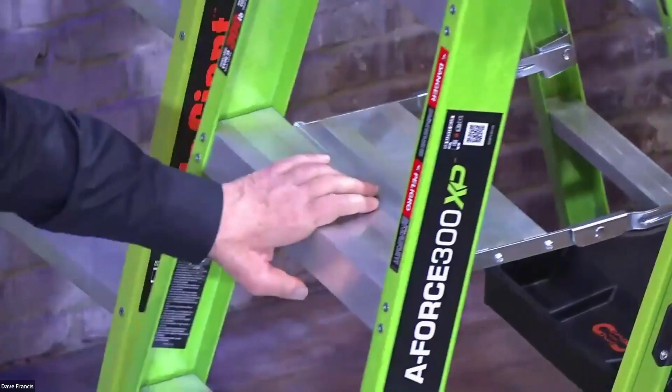Every ladder that Little Giant ships has a QR code on it. If you scan that QR code, it'll take you to the page that gives you your inspection checklist, your parts lists, and your how-to videos. That's unique to Little Giant - we have a barcode or QR code right on all of the products that you can scan with your phone, and it'll take you right to the training or the inspection sheets. The app we recommended earlier in the presentation, the NIOSH app, is a tutorial - it doesn't actually keep track of the information, it just gives you a tutorial.

There are 3 or 4 companies on the market that sell inspection software that not only walks you through it, but makes a record of it and keeps charts and graphs. If you want to go the extra mile with your ladder inspections, you can scan each ladder and it will record all of the answers to that.

Bob, and the UTA, you have been platinum partners in supporting Ladder Safety Month. We appreciate your support and your desire to keep everybody safe. I hope you learned something today, that we were a little bit entertaining, but that you at least recognize the dangers of something as simple as a ladder. It isn't unsafe as a product - it's basic and easy to be misused. We misuse the product and make it unsafe, but it's overbuilt as a product for what it's designed for. So follow the basic rules, don't get creative, never overreach. That's the number one rule.